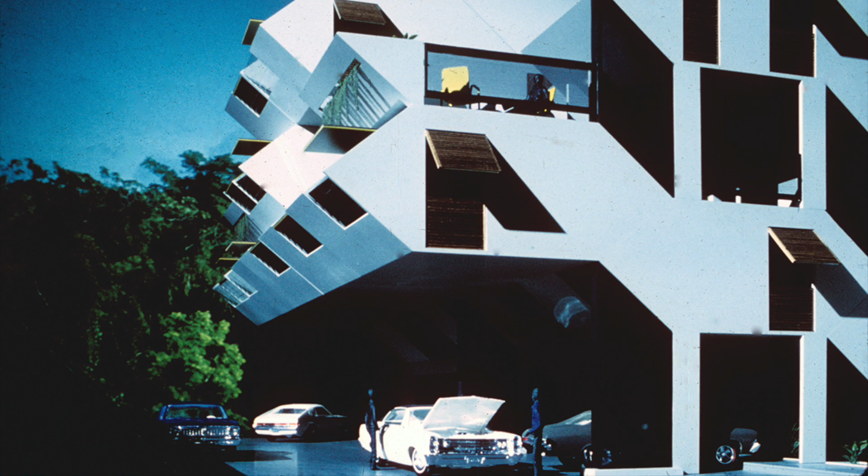In the hills above San Juan, Puerto Rico, lies the remains of a failed dream—a dream to redefine the apartment building. This is Habitat Puerto Rico, the ambitious follow-up to the first Habitat in Canada, designed by architect Moshe Safdie. It was designed as a living blueprint for the future of affordable housing. Unfortunately, it never came to be. But while this version of Habitat failed, was the entire concept a failure?

To answer this, we've got to go back and travel a few thousand miles north to Montreal, Canada, and back to the summer of 1967, an exciting time for the city as it played host to the last of the great World's Fairs, Expo 67.

The Expo opened on April 27, 1967. By the end of the Expo, 50 million visitors would walk through its gates and bear witness to some of the most exciting and innovative ideas in architecture at the time. There was Buckminster Fuller's geodesic dome, the United States Pavilion, and Frei Otto's Germany Pavilion. For as impressive as those pavilions were, the one with the greatest impact would be the mountainous collage of boxes and terraces known as Habitat 67.

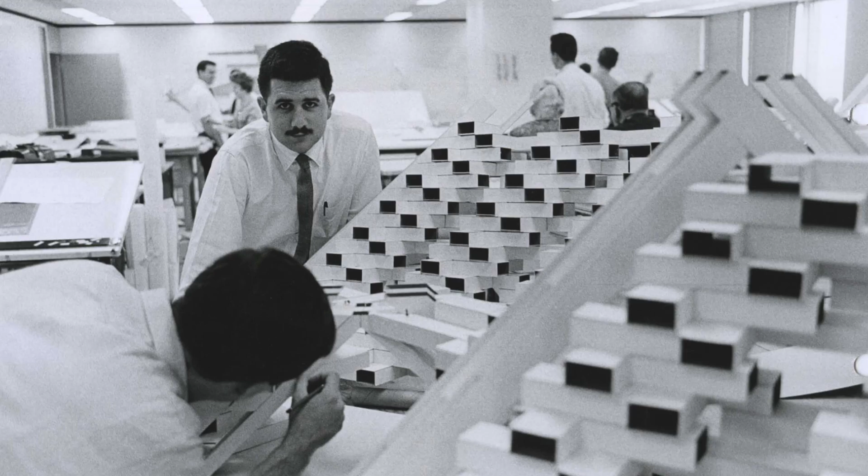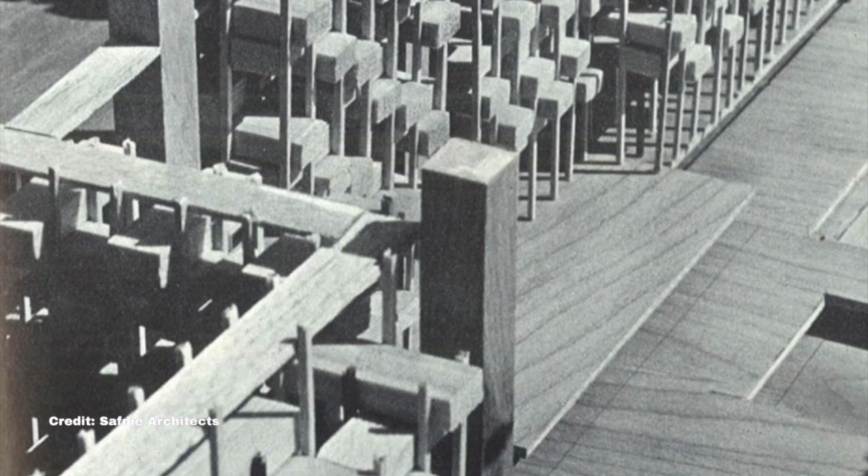The innovative housing complex began when Safdie was a student at McGill University. In 1959, he received a scholarship to study housing in North America. While on his travels, he saw the triumphs and failures of housing over the past 50 years. The lack of mobility in the suburbs and the lack of individuality in public housing were alarming to him.

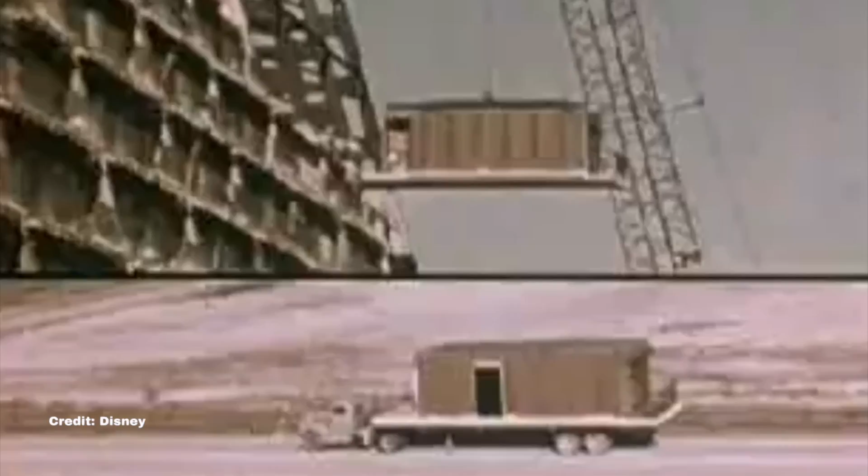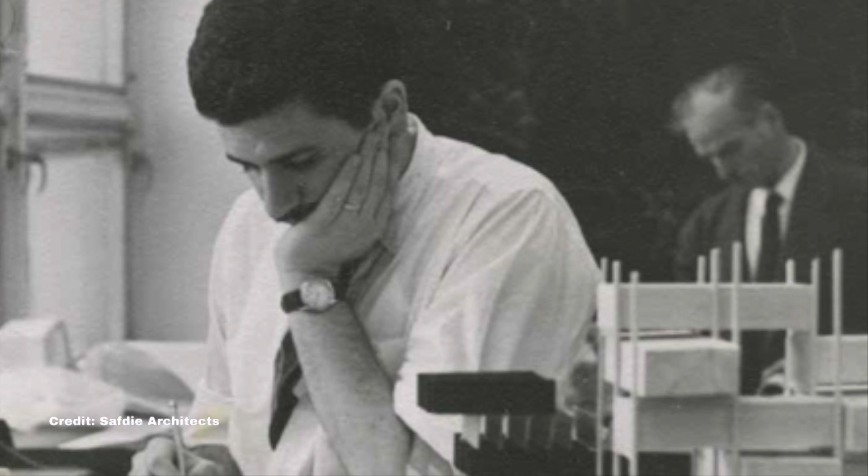So for his thesis, he aimed to marry the best of suburban and urban living into one complex. Beyond that, he saw the possibilities of prefabrication as a way of building houses quicker and more affordably. His thesis, titled A Case for City Living, did not center on a specific building, but rather on a broader building system centered around modules. These were uniform, prefabricated units that could be arranged to fit different sizes. This freedom of organization would allow for interesting arrangements, as well as give residents access to private terraces and gardens.

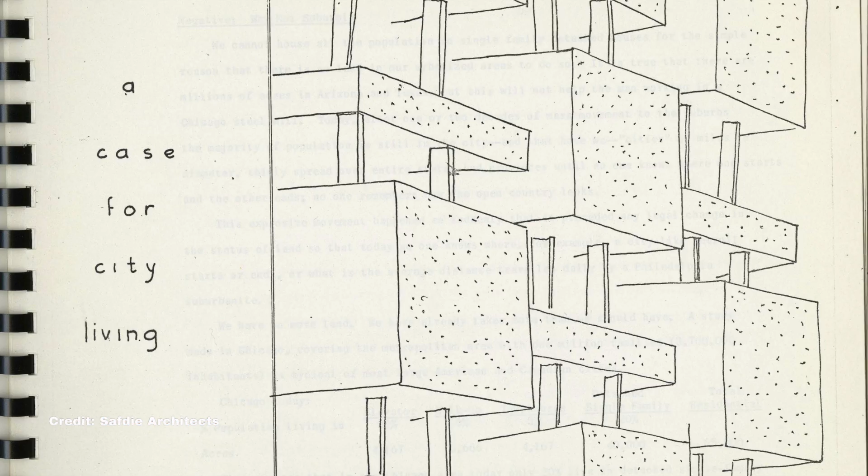The thesis garnered praise from his professors, especially from his thesis advisor, the architect Sandy Van Ginkel. However, it appeared that the thesis would remain on the shelf, as Safdie got a job working for the famed architect Louis Kahn. A year later, though, Safdie got a call from Ginkel.

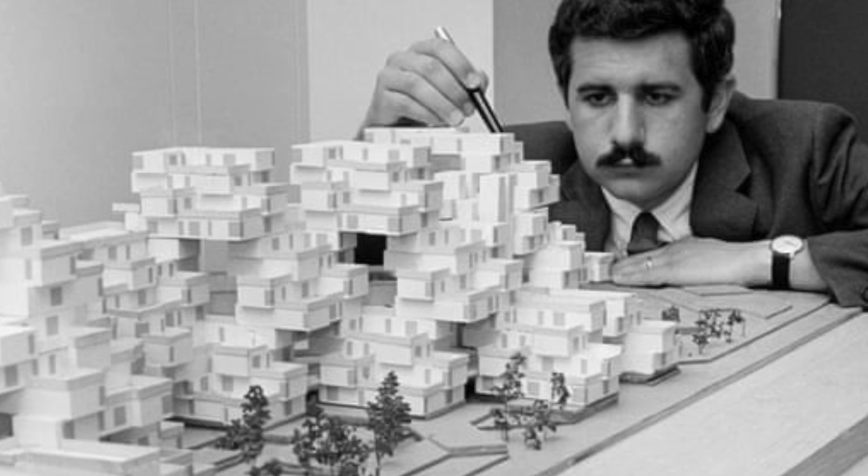He invited him to join the team designing the master plan for Expo 67. Safdie agreed to join the team on one condition: the Expo build his thesis project. Much to his surprise, Ginkel agreed, and soon the 23-year-old architect was designing what could possibly be a revolutionary concept. But it wasn't going to be easy.

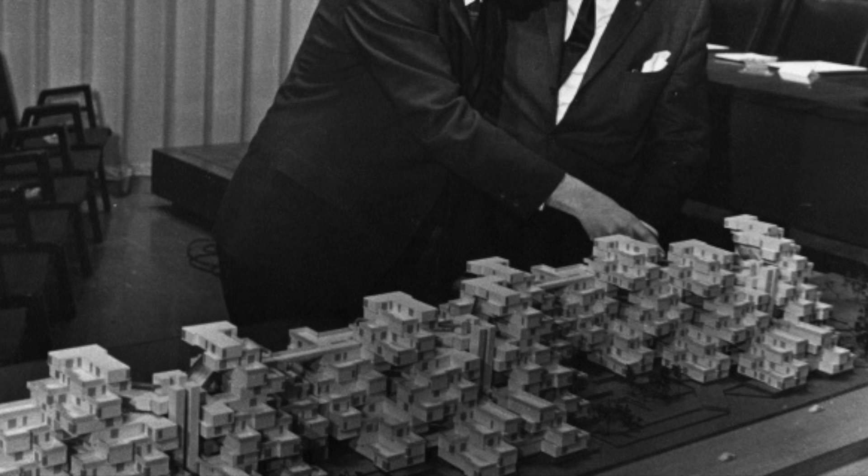As Safdie began translating his thesis into a working concept, his ambition grew exponentially. His original thesis had a vertical massing, with prefabricated modules fitted into a steel structure. The desired private terraces were achieved through voids in the structure. To attract attention and create better pedestrian circulation for residents, the plan changed dramatically.

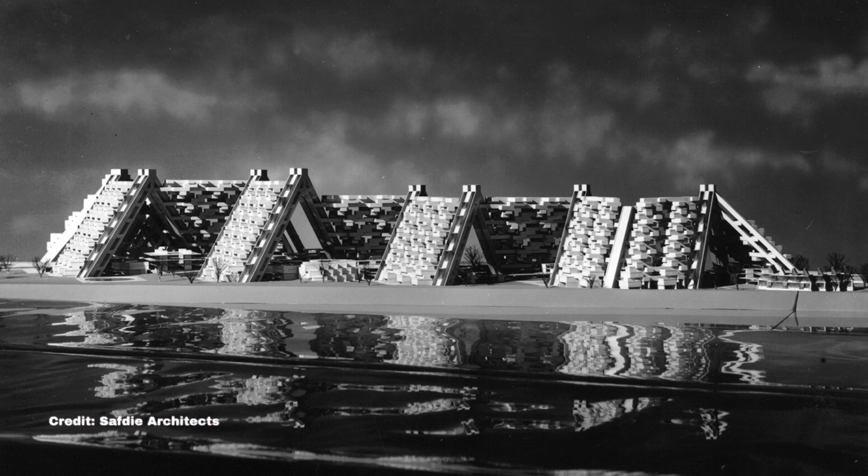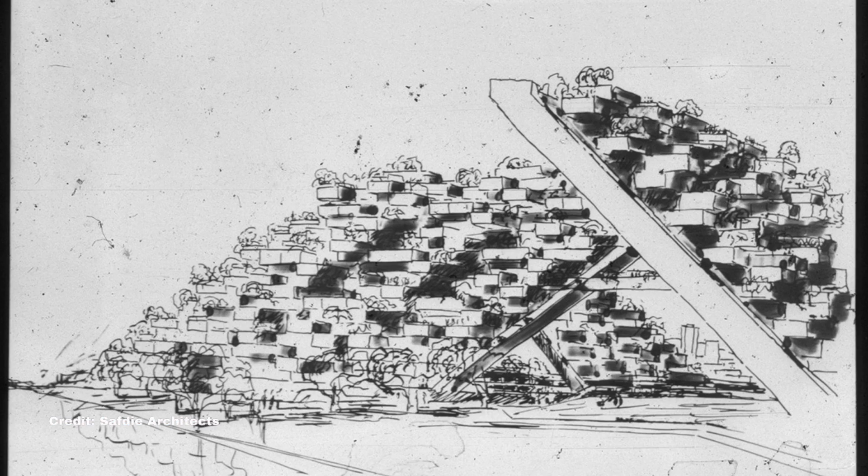The new design for Habitat was a vast 1,200-unit residential complex, complete with schools and shops. And all the residential units would be placed within a large concrete A-frame structure. To build such a building, a massive amount of money would be needed. When no private companies offered to sponsor the project, the Canadian government agreed, offering Safdie and his team $17 million, a significant downgrade from the envisioned $47 million.

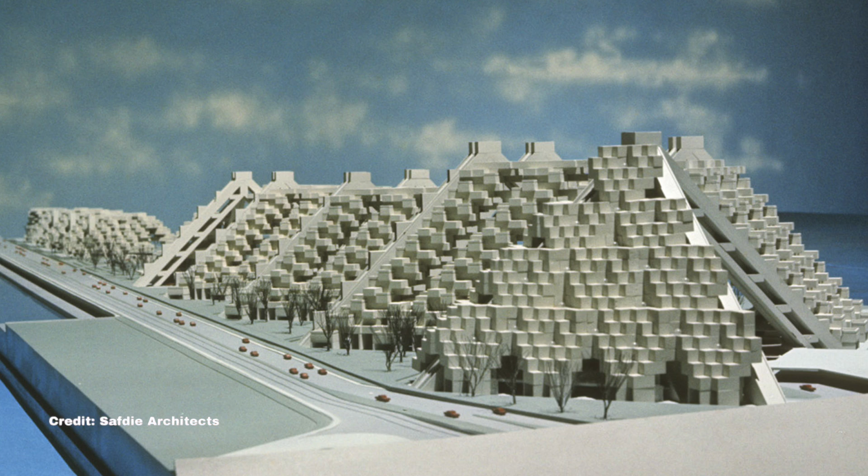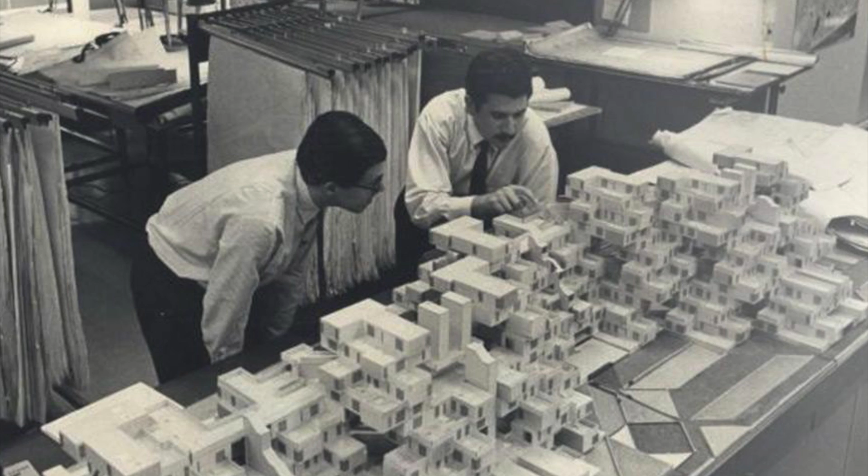With budget cuts came a damper in the ambition. The project was scaled down from 1,200 residential units to a mere 158 units. The project, as it stood, could no longer support the community amenities that Safdie envisioned. He seriously considered walking away from the project entirely, but he knew that the project was a proof of concept, a proof that such a project was even possible.

And he hoped that a developer would be inspired by the project and offer to either finish it or build a new one at a grander scale. And so the project went forward, even as government officials tried to take the funding away.

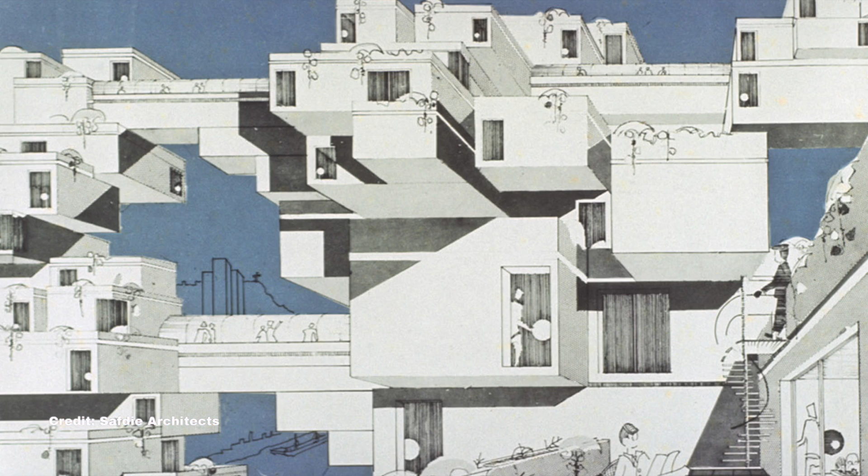The project went through countless models, including some made of Lego bricks, and drawing after drawing. Eventually, Safdie and his team created a 600 square foot module that was large enough to support its own weight and the weight of the other units. They created a series of arrangements that allowed the modules to create private terraces for every unit, creating its main selling feature.

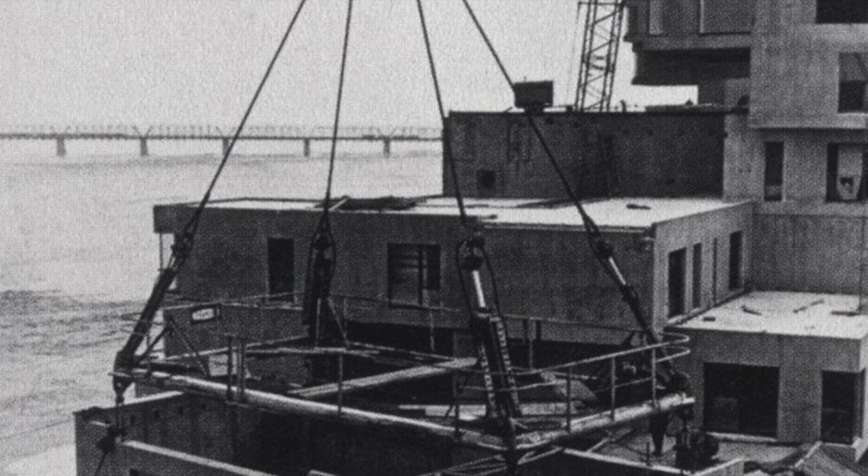As construction began, critics emerged, seeing the unorthodox form as merely a novelty, and questioned the need for prefabrication. In the end, it was a race to get the building finished in time for Expo. When it opened with the Expo, Safdie was among the many new residents, getting a taste of future living.

As Safdie lived, overlooking the Expo from his private garden in Habitat, on the ground, two developers, Fred Epstein and Heyman Elichar, were admiring the innovative structure, trying to see how the mammoth building was built. They were executives from the Development International Corporation. Though their reputation in the industry was that of a conservative one when it came to building, an opportunity working with the federal government in San Juan, Puerto Rico, gave them the confidence to try something radical.

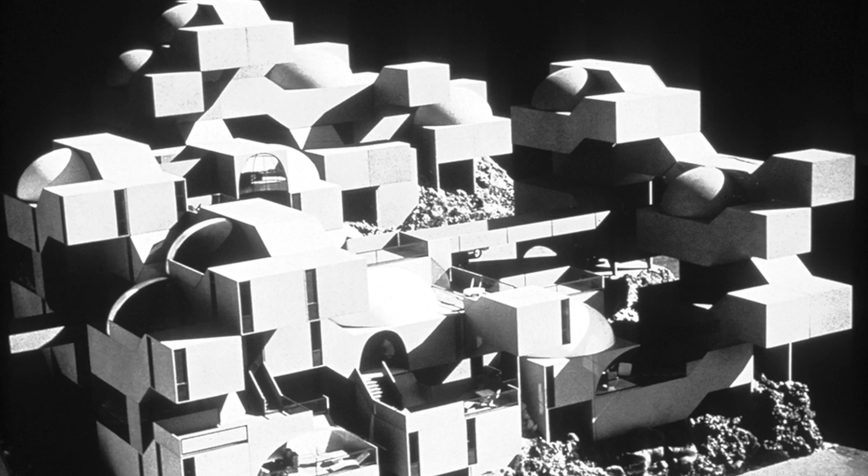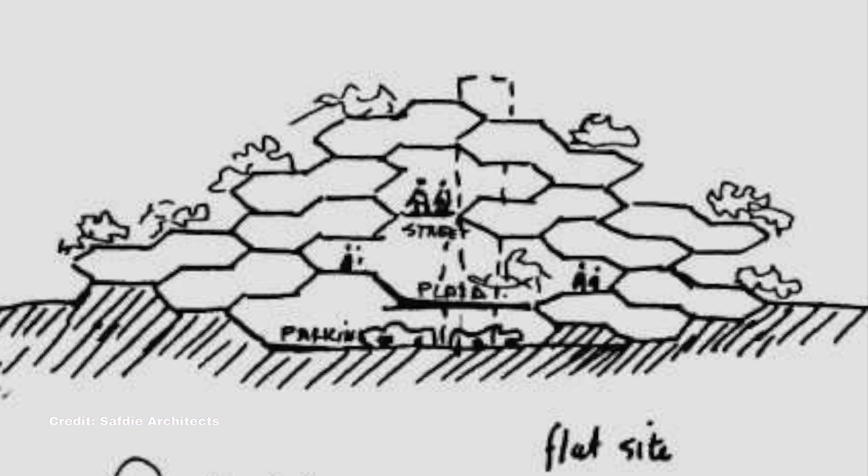At the end of Expo 67, the two contacted Safdie, who at the time was working on several Habitat projects across America. Safdie met with the two developers and eventually added Puerto Rico as the site of the next Habitat. While Puerto Rico's Habitat shared many similarities with the other Habitat projects, mainly getting stuck in bureaucratic tape, Puerto Rico had the commitment of a large development company behind it, eager to push it forward.

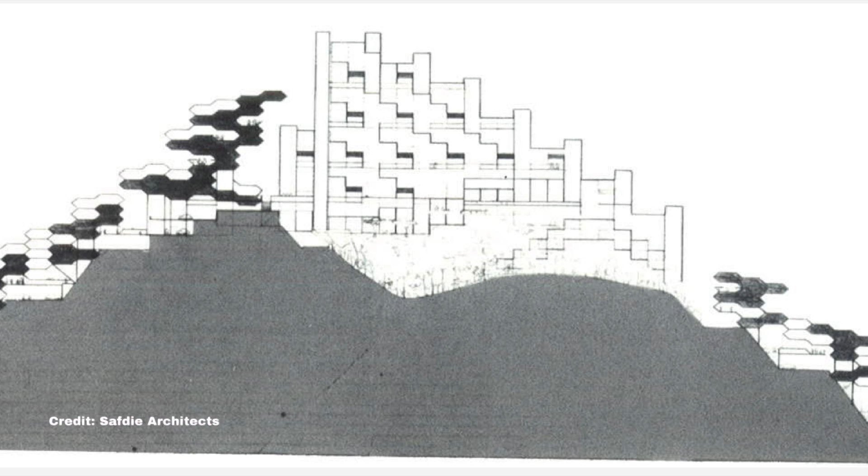Design work for Habitat Puerto Rico began in early 1968. DIC had a site already selected, a large 20-acre site on the side of a 250-foot-high hill in the San Patricio neighborhood of San Juan. It would feature 800 prefabricated units clustered into units of 12, creating 264 residential units on the hillside, nearly doubling the number of units at the original Habitat.

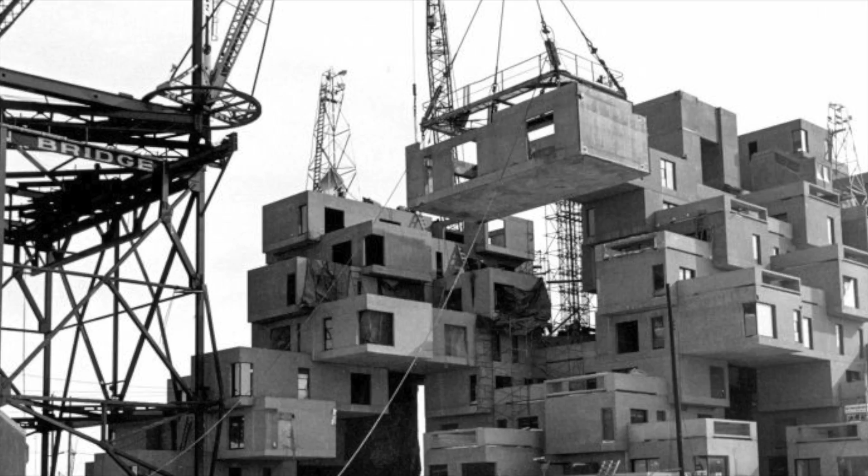Beyond this, the DIC envisioned Habitat's prefabricated units being purchased by themselves as single or multifamily units elsewhere on the island. The first hurdle that Safdie had to overcome was the location of the factory to produce the modules. Unlike the Montreal site, the Puerto Rico site was too rugged, meaning that the factory would have to be elsewhere, and the units would have to be trucked to the site.

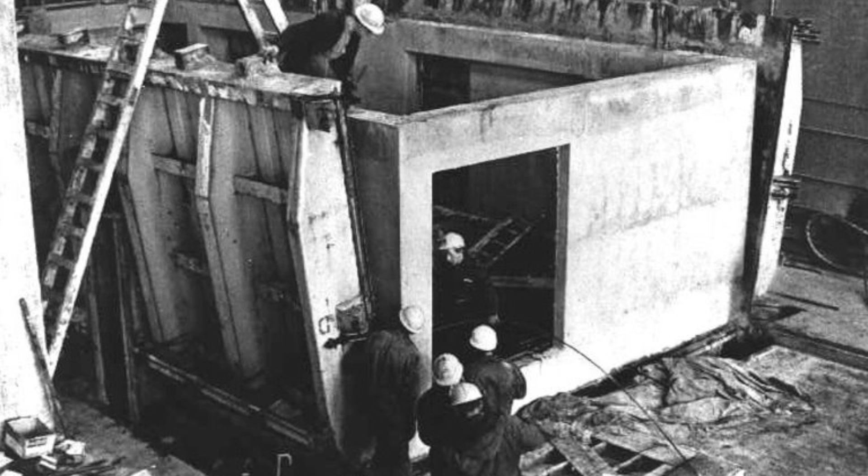This called for a complete redesign of the original modules. The new units would be reduced from 17 feet wide to 12 feet wide, which caused their own set of challenges. With the smaller modules, an entire residence could not fit within one unit, so Safdie devised a split-level design that would be parallel to each other on an incline.

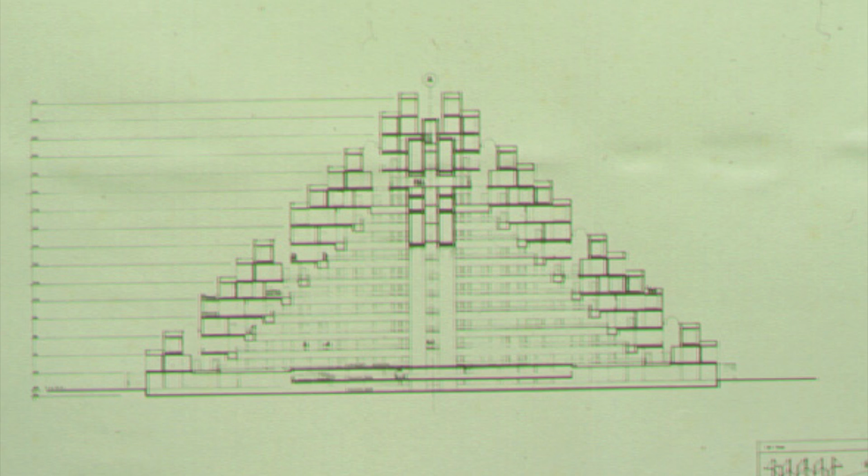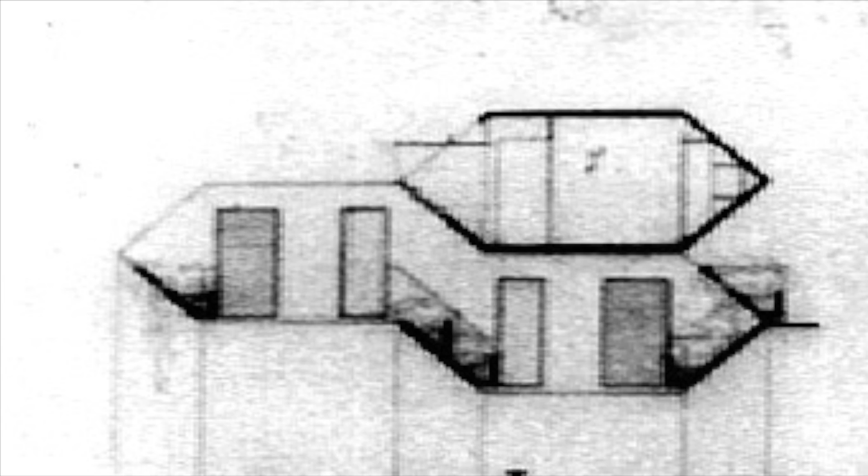This provided its own set of challenges, though. There was not enough space for stairs to go between the two modules, so there needed to be a change in the shape of the module. Safdie and his team came up with an elongated hexagonal shape, with walls angled to match the pitch of the stairs. This allowed these modules to fit in perfectly, creating more spaces for residents and adding density.

The promise of private terraces would also be retained. Plus, the updated design had a great futuristic look. Though some would criticize the development for a lack of context, there was a hint of it in the ways the modules and the units were clustered together.

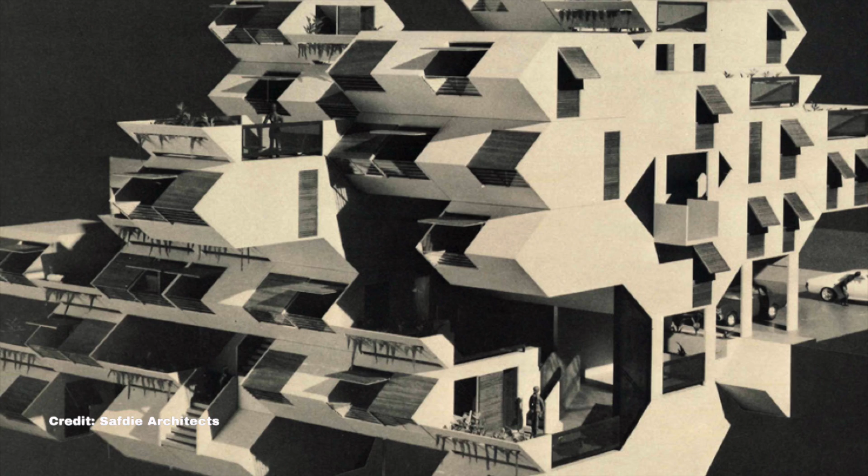Safdie noticed in his research that the traditional Spanish house that dotted the landscape of Puerto Rico featured a central atrium with rooms on all sides. This was mimicked as various modules would be placed around a central court. The modules above would cantilever over to provide shading for it as well. An added benefit to this new design was it allowed for an easier circulation pattern for pedestrians. The original Habitat had long walkways and central elevator shafts that significantly raised the price of construction.

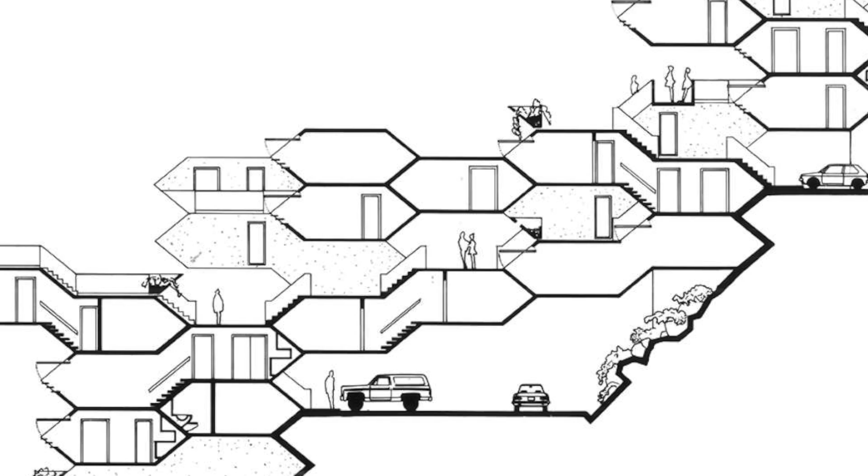But with the added density and placement of the modules, the site created natural walkways, with only a few sets of stairs needed to connect levels of the development.

In 1969, DIC was purchased by two other development companies, both committed to continuing the Habitat project. With money in hand, the start of construction was to begin any day now.

That was until the Federal Housing Administration, which was subsidizing the project, published a report saying that the site's soil was not suitable for such a large project.

A new site was found on the eastern side of San Juan. It was a similar landscape with great views of the city below, but the new site brought a change in plans. The project's ambition, as with the original Habitat, was cut significantly, from 800 modules to 300 modules.

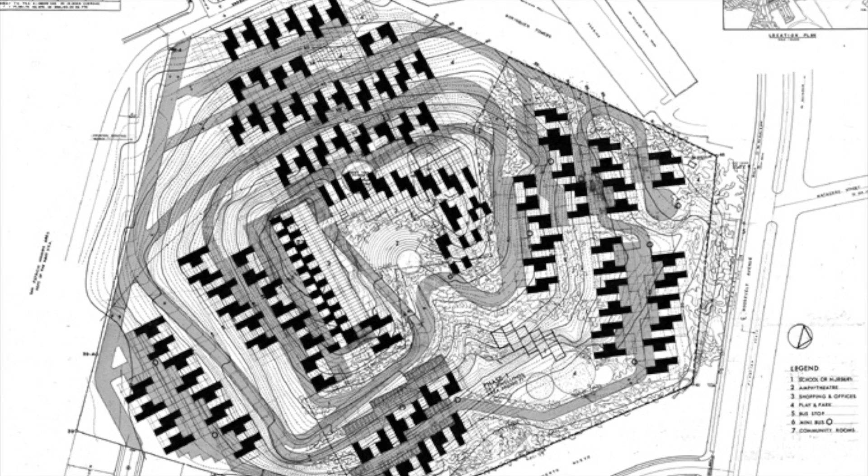The one benefit of the downsizing was the fact that the factory that would be prefabricating the modules could be built on site. Though disappointed, Safdie and the DIC were still committed to the project, and construction of the factory began in April 1970, with the construction of the modules beginning that June.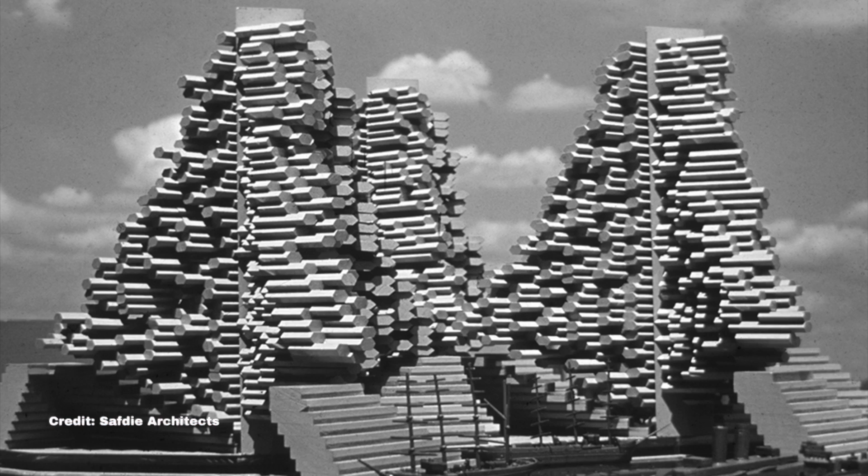Despite the proximity to the site from the factory, transporting the prefabricated modules was still a hassle, and costs started to rise. By the time construction was underway in Puerto Rico, Safdie's other Habitat projects were all shelved, placing the future of Habitat solely in the hills of San Juan.

Even as Safdie questioned the slow progress, Fred Epstein assured him by saying, quote, 'I'll go as high as I have to go. I'm not going to take no for an answer.' Except a no was taken.

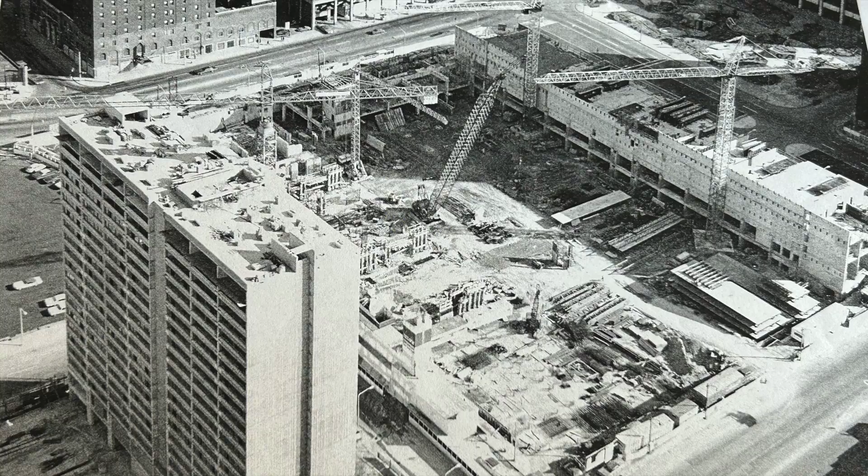In 1973, the world was plunged into the oil crisis. The cost of construction rose, but worst of all, the federal government had pulled the plug on the 221 housing program, the program that subsidized the developers for constructing affordable housing.

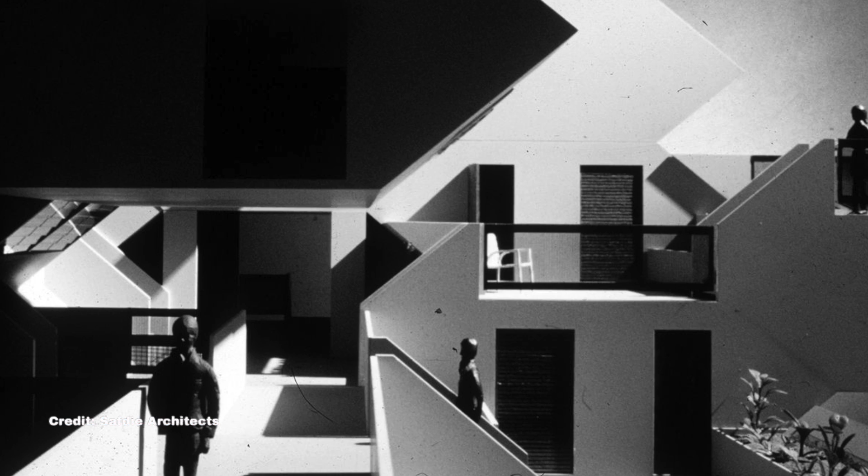Without the government's financial help, the cost of building the experimental project was too much for the DIC to take. Work stopped on Habitat Puerto Rico that year, with only 30 modules constructed, half of which were placed on the hill overlooking the city.

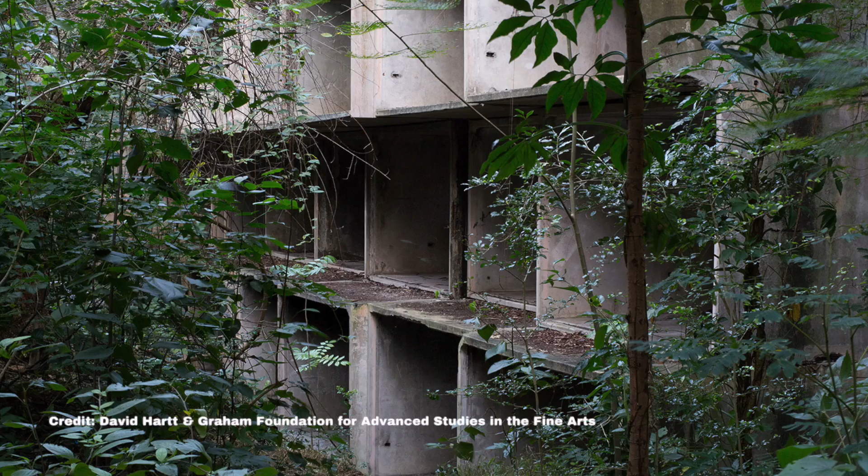With that, Habitat Puerto Rico was now abandoned, and with it, the dreams of Habitat.

You would think this would be the end of our story, but following the cancellation of all the other Habitat projects, including the one in Puerto Rico, Safdie's career continued to soar.

His work spanned the globe, designing museums and airports. He gained the attention of the world yet again in 2010 with his Marina Bay Sands project in Singapore, with its defining rooftop deck and infinity pool.

In 2018, the Canadian artist David Hartt documented the ruins of Habitat Puerto Rico in a film titled In the Forest, which aimed to showcase the relationship between nature and architecture.

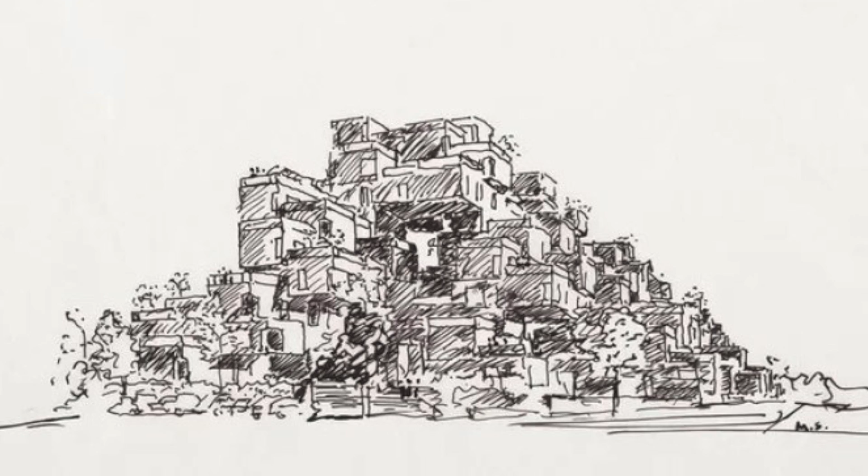And a year earlier, Safdie decided to revisit Habitat's concepts. He enlisted his firm to think of ways to update the ideas of Habitat. Gone would be the modular construction, but remaining would be the dedication to density and enhancing livability with open spaces.

This updated approach to Habitat found a receptive audience in Asia. Here, urban living at a mega scale is a challenge, and Habitat seems to provide the answers.

In recent years, Safdie's firm has designed and built new versions of Habitat throughout Asia, their Sky Habitat in Singapore, and the massive Habitat Qinhuangdao, a project on par with the original vision of Habitat 67.

In these new versions, we see the story of Habitat continues to be written. It has inspired countless architects over the years to think of the possibilities of apartment living.

The fact that Habitat has remained a relevant idea close to 60 years now is a testament to the determination and vision of its architect, and proves that Habitat was not a failure, just ahead of its time.